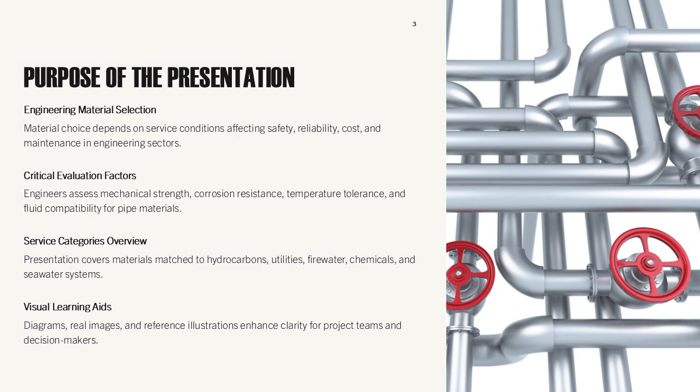and seawater systems. In addition, the narrative outlines the expectation that diagrams, real images, and reference illustrations support conceptual clarity for engineering teams, project stakeholders, and decision-makers. This introduction sets the tone for a professional technical learning session designed to improve understanding and application of engineering judgment in real projects.

Presentation Roadmap. This slide provides a detailed roadmap of the presentation structure. It explains that the session will begin with design philosophy and fundamentals of piping material engineering, followed by an in-depth look at each major pipe material category. Subsequently, the presentation will address service-based engineering requirements, compare material capabilities, highlight risks related to improper specification, and introduce relevant

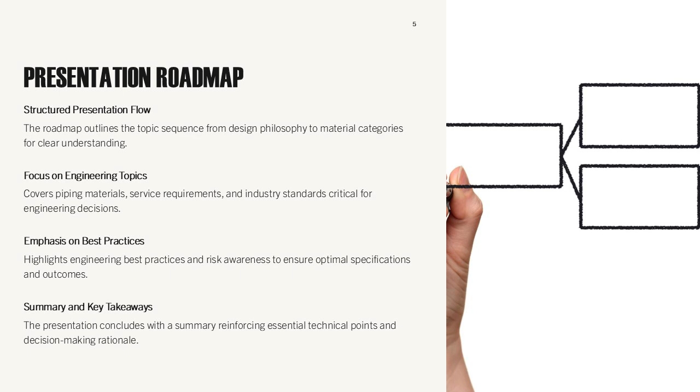industry codes and standards. The roadmap also indicates sections on engineering best practices and a conclusive summary to reinforce key technical takeaways. This ensures the audience understands both the flow and the rationale behind the sequencing of topics, enabling them to connect individual technical discussions to the broader engineering decision-making process.

Basics of material selection. This slide discusses the fundamental engineering principles behind selecting pipe materials for process and utility applications. It introduces concepts such as allowable stress, corrosion allowances, toughness, code-mandated minimum requirements, and the impact of operating pressure and temperature on material performance. The narrative explains how early material selection influences procurement cost, welding procedures, fabrication methods, and long-term

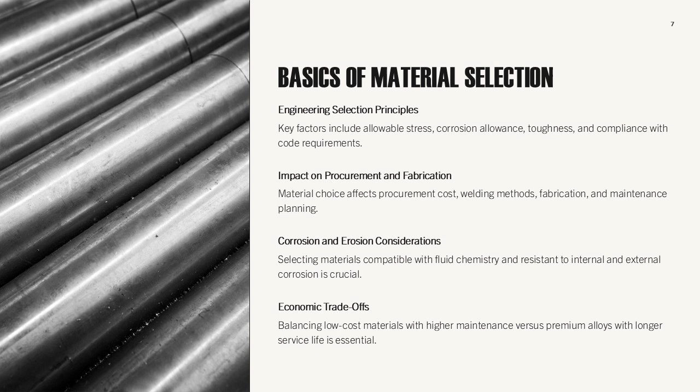maintenance strategies. The content also covers considerations like erosion resistance, compatibility with fluid chemistry, internal and external corrosion concerns, and the economic trade-offs between low-cost materials with higher maintenance needs versus premium alloys with long service life. These fundamentals help engineers form a strong foundation prior to evaluating actual material categories.

Characteristics and applications of carbon steel. This slide describes carbon steel as the most widely used material category in piping systems due to its strength, cost-effectiveness, and broad availability. It elaborates on grades such as ASTM A106, A53, and API 5L, which are commonly applied in hydrocarbons, steam, water, and general utilities.

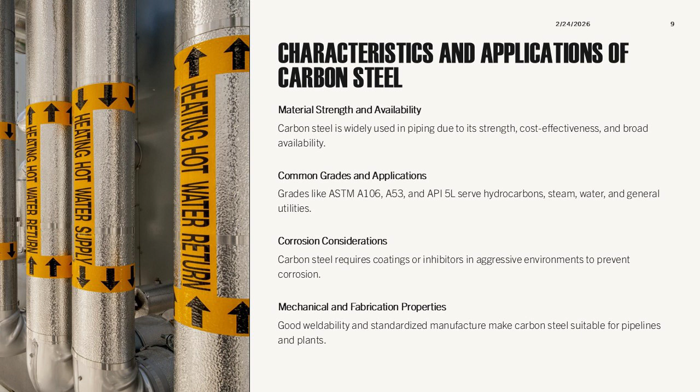The narrative discusses corrosion susceptibility, the need for internal coatings or corrosion inhibitors in aggressive environments, and typical limitations in sour service or high chloride systems. It also addresses mechanical robustness, weldability, and standardized manufacturing, making carbon steel suitable for extensive pipeline networks and industrial plants. This slide emphasizes that while carbon steel is versatile, engineers must always evaluate corrosion mechanisms to ensure long-term reliability.

Low-temperature carbon steel, LTCS, use in sub-zero and cryogenic conditions. This slide focuses on LTCS grades such as ASTM A333 Grade 6, engineered to maintain toughness and prevent brittle fracture at low temperatures. The content explains the metallurgical adjustments that improve impact resistance, making LTCS essential for LNG systems, cold climate installations, and refrigerated hydrocarbon services.

It highlights that selecting LTCS is critical in preventing catastrophic brittle failures during depressurization or emergency shutdowns. Engineers must verify minimum design metal temperature, MDMT, and perform Charpy impact testing as required by ASME B31.3. The narrative emphasizes that LTCS is used when carbon steel would otherwise lose ductility, ensuring system integrity under cold conditions.

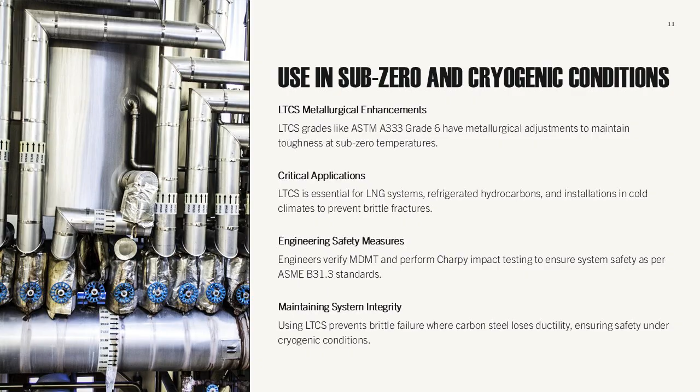Stainless steel, 304 and 316, corrosion-resistant applications. This slide explains that stainless steel, particularly 304 and 316 grades, offers excellent corrosion resistance due to its chromium-rich passive oxide layer. SS304 is suitable for general corrosion environments, while SS316, containing molybdenum, offers superior chloride resistance, making it preferred in marine, brackish water, and chemical handling applications.

The narrative covers stainless steel's benefits in hygiene-critical industries such as food processing and pharmaceuticals, as well as its higher cost and fabrication considerations. Additionally, it explains susceptibility to chloride stress corrosion cracking, galvanic interactions, and the importance of selecting the correct grade for long-term performance.

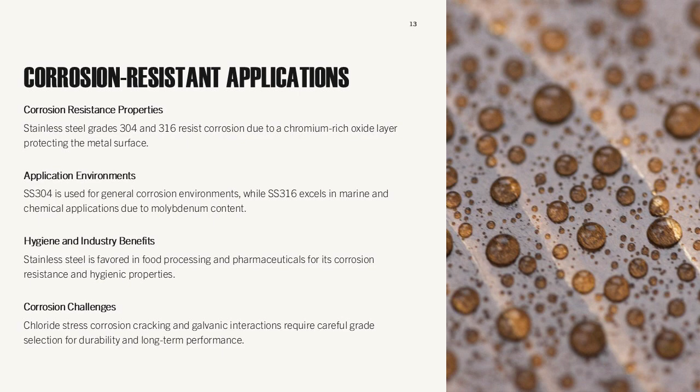Duplex and super duplex stainless steels, high-strength corrosion-resistant alloys. This slide describes duplex and super duplex alloys, emphasizing their unique mixed microstructure of austenite and ferrite that provides exceptional strength and chloride stress corrosion resistance. They are widely used in offshore platforms, subsea systems, and desalination plants, where standard stainless steels may fail due to

aggressive chlorides. The narrative highlights their fabrication challenges, heat treatment sensitivity, and higher material costs. Engineers must assess PREN values, welding procedures, and environmental factors to ensure the correct duplex grade is applied for seawater, injection water, or high-pressure subsea conditions.

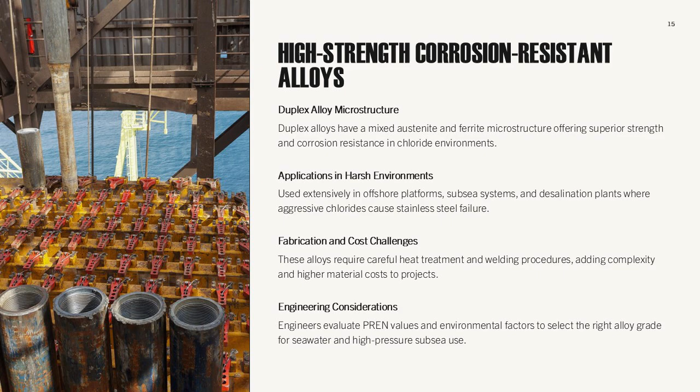Nickel-based alloys, extreme corrosion and high-temperature performance. This slide reviews advanced nickel alloys such as Inconel, Monel, and Hastelloy. These premium materials are used in highly corrosive chemical services, high-temperature applications, and areas where equipment failure is unacceptable. The narrative explains their exceptional performance in acidic environments, high-stress conditions, and thermal cycling.

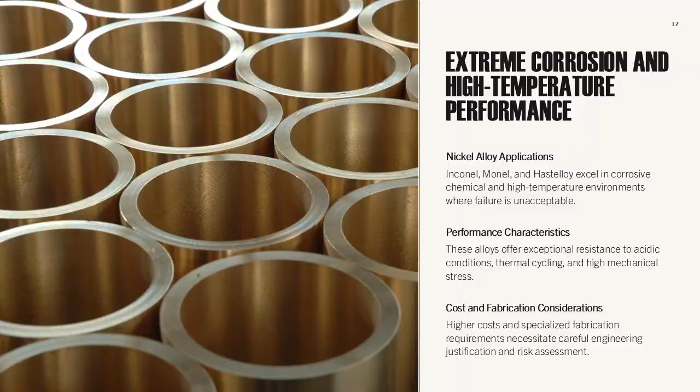However, they come with significantly higher cost and specialized fabrication requirements. Engineers must justify nickel alloys through rigorous risk assessment, life cycle analysis, and process safety considerations to ensure their selection aligns with project requirements. Galvanized iron, GI, utility and firewater applications. This slide covers the use of galvanized iron piping, which involves carbon steel coated with a protective zinc layer.

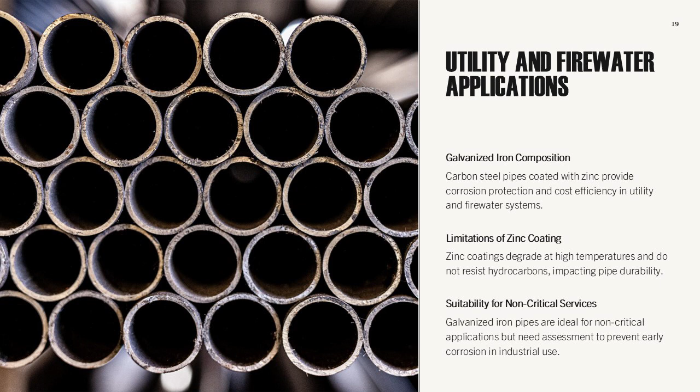GI is commonly used in building services, utility water, and some firewater networks due to its low cost and corrosion protection. The narrative discusses the limitations of zinc at higher temperatures, incompatibility with hydrocarbons, and risk of coating degradation over time. GI remains suitable for non-critical service conditions but requires careful evaluation to avoid premature corrosion or flaking in industrial environments.

Copper and copper alloys, instrumentation and utility applications. This slide explains the advantages of copper in small-bore instrumentation, HVAC refrigerant lines, medical gases, and air systems. Copper provides excellent thermal conductivity, corrosion resistance, ease of bending, and reliable joining methods.

However, the slide also highlights limitations such as reduced pressure capability compared to steel, vulnerability to ammonia-induced stress cracking, and higher cost relative to plastics. The narrative reinforces that copper is typically used in specialty or non-process lines rather than core industrial piping systems.

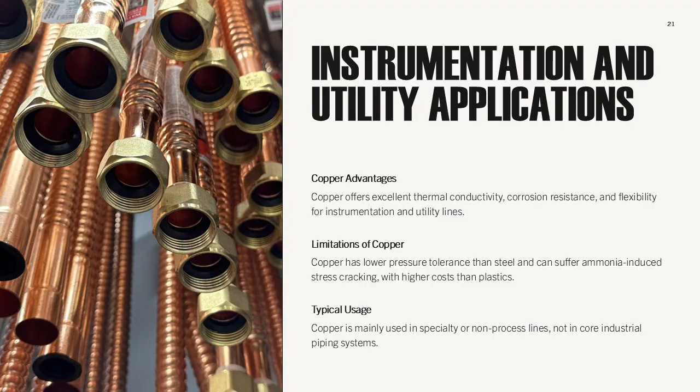PVC, CPVC and UPVC, plastic piping for low-pressure systems. This slide describes polymer-based piping such as PVC, CPVC, and UPVC, used in low-pressure chemical drainage, water distribution, and non-hydrocarbon services. It explains key advantages including corrosion immunity, lightweight installation, and cost-effectiveness.

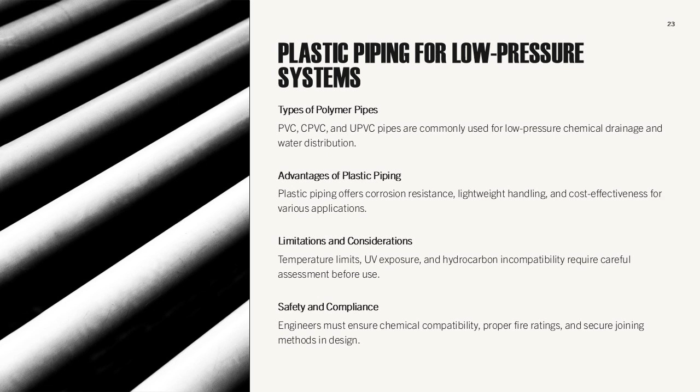However, temperature limitations, UV sensitivity, and incompatibility with hydrocarbons must be addressed. Engineers must verify chemical compatibility, fire rating, and joining methods for safe application in industrial environments.

HDPE and PE, flexible piping for buried and distribution systems. This slide explains the use of HDPE and PE pipes in water, gas distribution, and underground utilities. Their flexibility, fused joints, and resistance to soil movements make them highly reliable in buried installations.

The narrative discusses their chemical resistance, pressure classes, and installation techniques such as butt fusion and electrofusion. Limitations include reduced performance at elevated temperatures and the need for controlled installation procedures to ensure weld integrity.

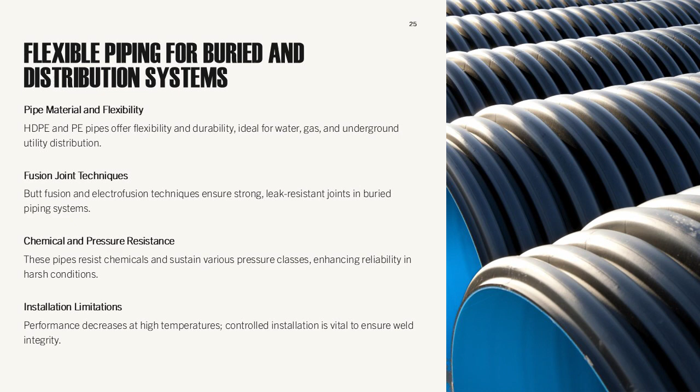GRE or GRP composite piping, corrosion-resistant composite systems. This slide describes GRE and GRP composite systems made from glass fibers and epoxy resin matrices. These materials offer excellent resistance to seawater, chemicals, and firewater corrosion. They are widely used in offshore platforms and desalination facilities.

The narrative also highlights challenges such as susceptibility to impact damage, strict installation procedures, and UV sensitivity. Proper engineering evaluation ensures composite piping is used where corrosion is the dominant risk driver.

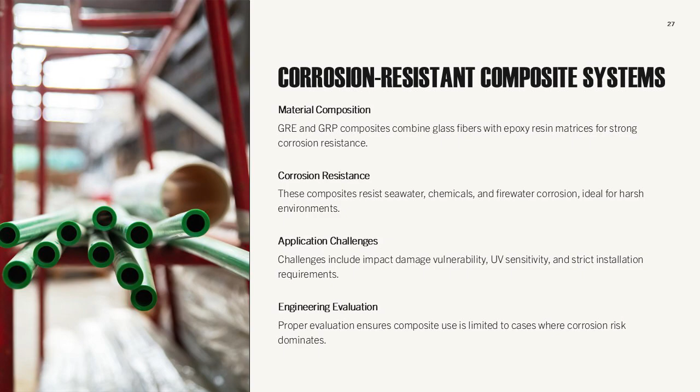Concrete and RCC pipes, structural piping for civils and drainage. This slide focuses on concrete and RCC pipes typically used for stormwater, sewage, culverts, and large diameter drains. Their high compressive strength and long service life make them ideal for non-pressure applications.

The narrative highlights their weight, installation requirements, joint sealing considerations, and unsuitability for high-pressure fluid systems. Civil utility networks rely heavily on concrete pipes for structural load-bearing performance and durability.

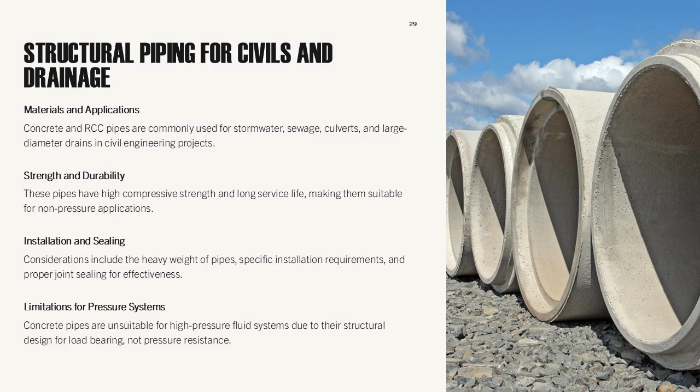Classification of industrial piping services. This slide categorizes common industrial piping services: hydrocarbons, liquid and gas, utilities, air, steam, water, chemicals, cooling water, seawater, and firewater. The narrative explains that each service category imposes different corrosion, pressure, and temperature requirements.

Understanding these categories is foundational to determining the appropriate material specification. Engineers analyze fluid composition, operational cycles, phase changes, contamination risks, and external environmental exposure when classifying services.

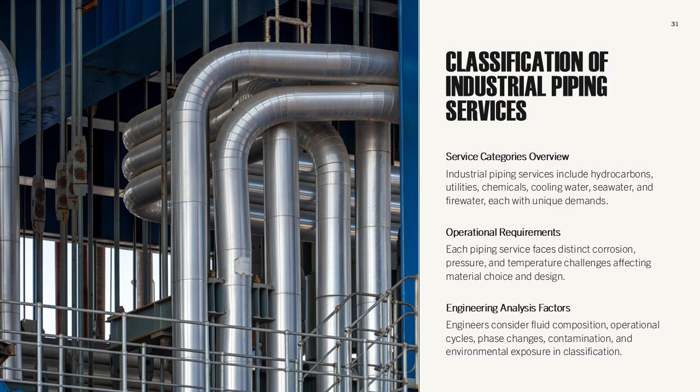Material selection criteria, engineering factors affecting material choice. This slide discusses the primary criteria used in material selection: design pressure and temperature, corrosion mechanisms, mechanical loading, erosion, fluid chemistry, and life cycle economics. It explains how codes like ASME B31.3 define allowable stresses and material limits.

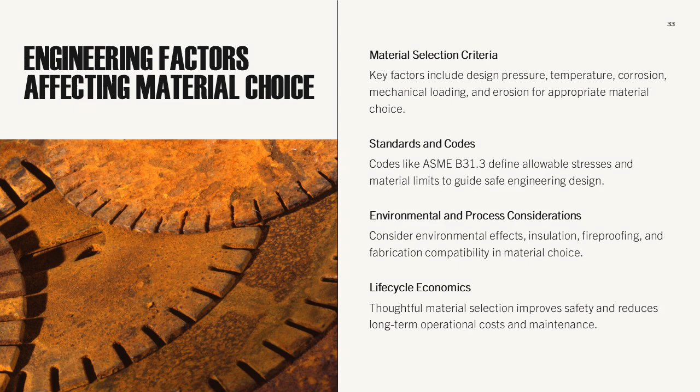Engineers must evaluate environmental conditions, insulation interactions, fireproofing needs, and compatibility with fabrication processes. The narrative emphasizes that thoughtful material selection ensures safety and reduces long-term operational costs.

Material versus service comparison, typical material-service mapping. This slide provides an analytical comparison of how pipe materials align with various services. Carbon steel is typically used for general hydrocarbon service, stainless steel is selected for corrosive or hygienic applications, duplex is chosen for seawater or high chloride environments, GRE is applied where corrosion dominates, and plastics serve low-pressure utilities.

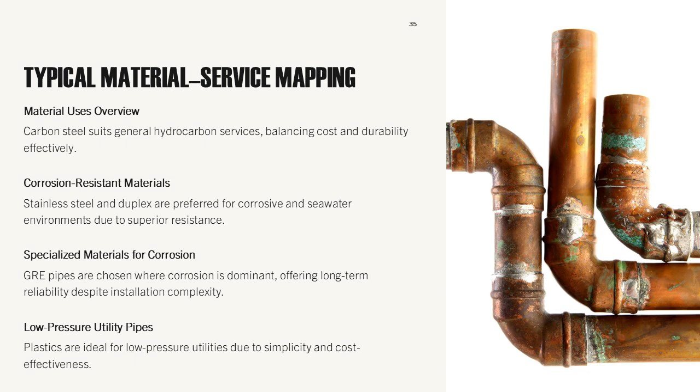The narrative explains the trade-offs between cost, performance, installation complexity, and long-term reliability in different industrial settings. This comparative understanding enables engineers to make informed decisions.

Risks of incorrect material selection, engineering and operational hazards. This slide highlights the consequences of selecting incorrect materials, including rapid corrosion, leaks, rupture, safety incidents, unplanned shutdowns, contamination, and extensive maintenance costs. It explains how mismatched materials can cause galvanic corrosion, stress cracking, thermal failure, and structural degradation.

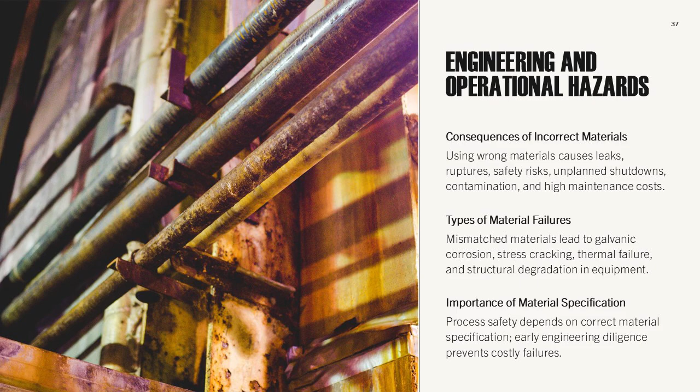The narrative stresses that process safety relies heavily on correct material specification, making early engineering diligence essential to avoid costly failures. Applicable international engineering standards.

This slide outlines major standards governing piping design and materials, including ASME B31.3, process piping, B31.4, pipeline transportation, B31.8, gas pipelines, ASTM material standards, and API specifications.

It explains that compliance ensures minimum safety requirements, material qualification, testing procedures, and fabrication quality. Engineering specifications from clients often build upon these standards, adding additional requirements for harsh environments or specialized processes.

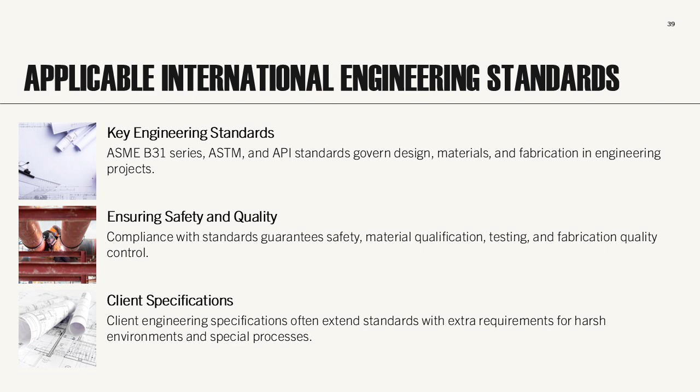Engineering best practices, approaches for reliable material engineering. This slide presents best practices such as conducting corrosion assessments early in design, performing material-fluid compatibility reviews, consulting vendors for alloy suitability, verifying heat treatment procedures, evaluating lifecycle cost rather than upfront cost alone, and documenting all engineering decisions.

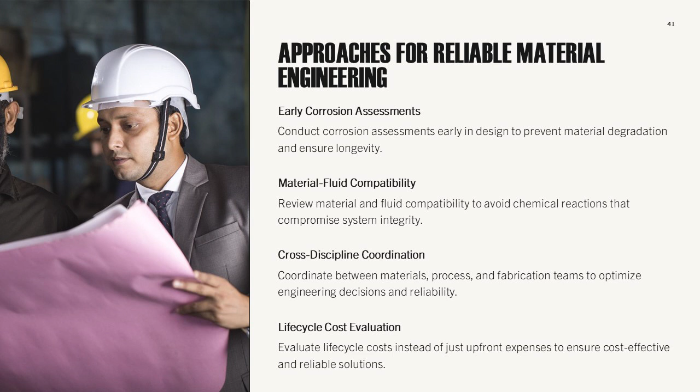It emphasizes cross-discipline coordination between materials engineers, process engineers, and fabrication teams. Following these best practices significantly enhances system reliability and operational safety.

Key takeaways. The concluding slide reinforces the central message that material selection must always be driven by service conditions, operational requirements, and safety considerations. It summarizes the importance of understanding each material category, recognizing limitations, adhering to engineering standards, and applying sound judgment throughout the project lifecycle. The narrative encourages engineers to continuously expand their knowledge of materials to ensure safe, efficient, and cost-effective piping systems.